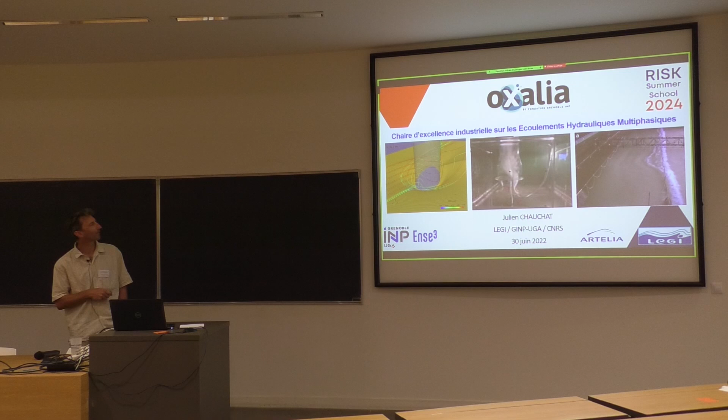I don't know if you heard about industrial chairs. They are run by the Fondation Grenoble INP, so it's kind of mécénat, a relationship between research labs and the Grenoble INP Foundation. A company gives money to try to trigger research in their field of interest. With Artelia, we built this chair OXALIA, which doesn't mean anything—it's just a name close to Artelia—and it's about multi-phase hydraulic flows.

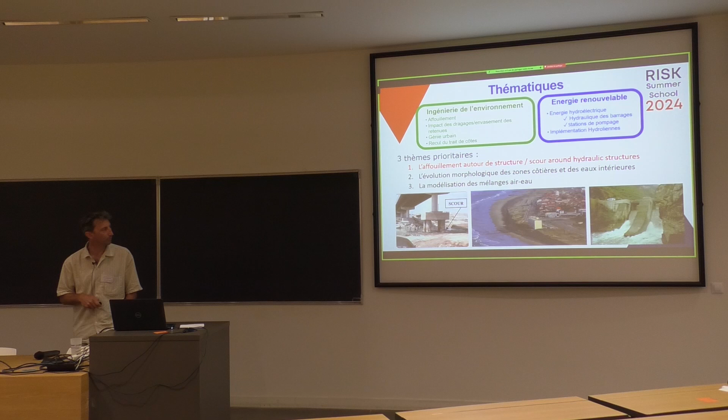More specifically, there are three research themes. This is in French, but I'll translate the first one: Affouillement, which is scour, and I will define that—it will be the topic of my talk today. The second topic is morphological evolution of coastal zones and rivers. The third topic is the modeling of air-water mixtures, like in plunging jets and so on.

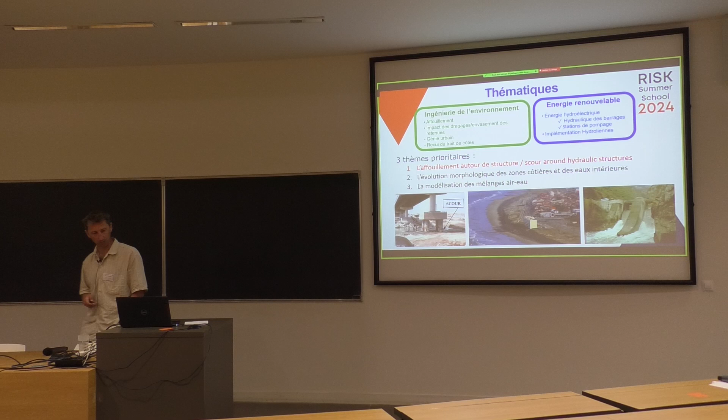So the topic of my talk today is scour around hydraulic structures, which is in fact the main cause for bridge failures. I will show you statistics about this in a few minutes.

This is the outline of my talk: a few motivations, analysis of recent and not-so-recent bridge failures in the US. Then I will describe the flow and sediment transport processes involved in this problem. I will say a few words about the numerical modeling that we try to do, both in engineering and in research, to solve this topic.

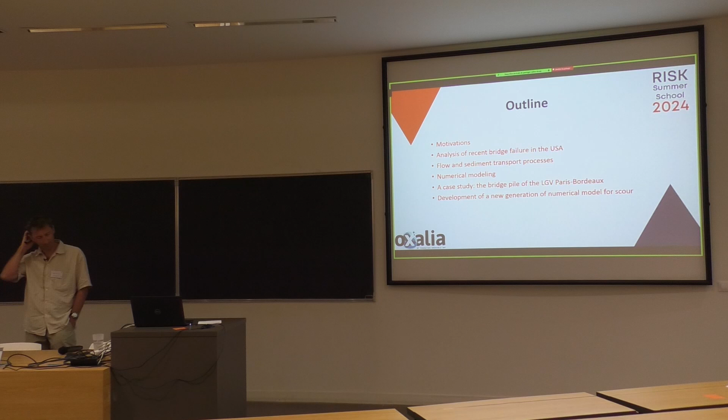I picked a case study from Artelia—they gave me a recent case they did on a bridge pile on the LGV Paris-Bordeaux, the fast train line between Paris and Bordeaux. And I will conclude with the development of a new generation of numerical model, which is the topic of the chair.

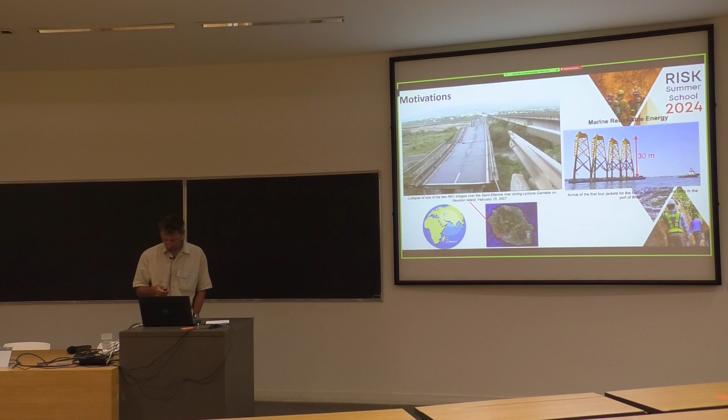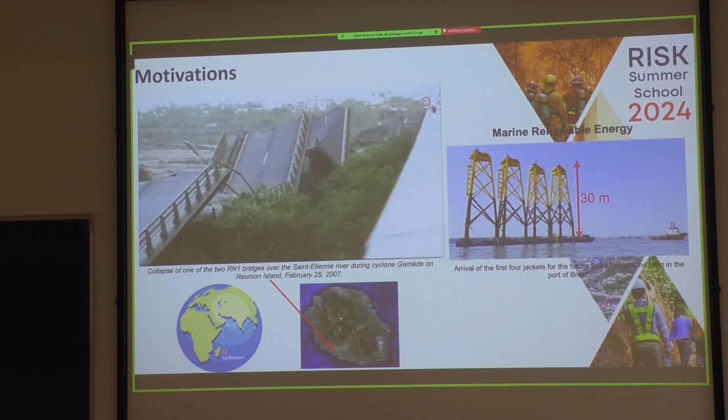All right, motivations, two examples. So here is a movie of... okay, cut it short.

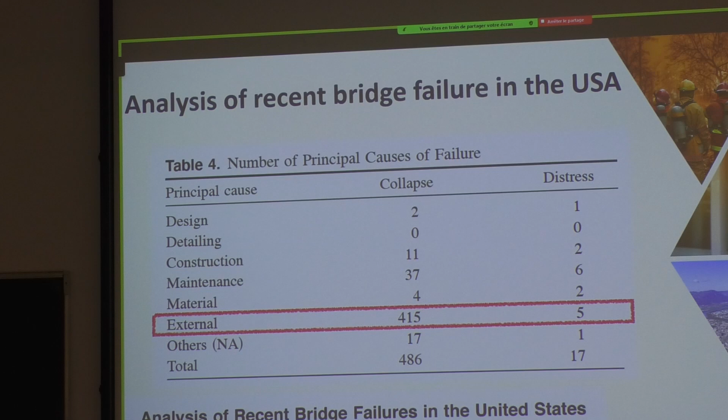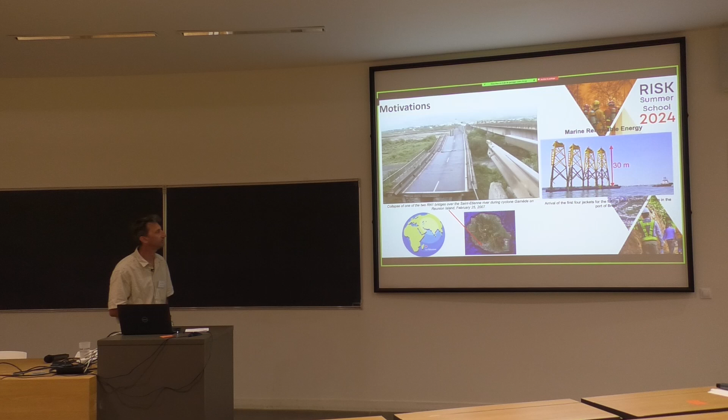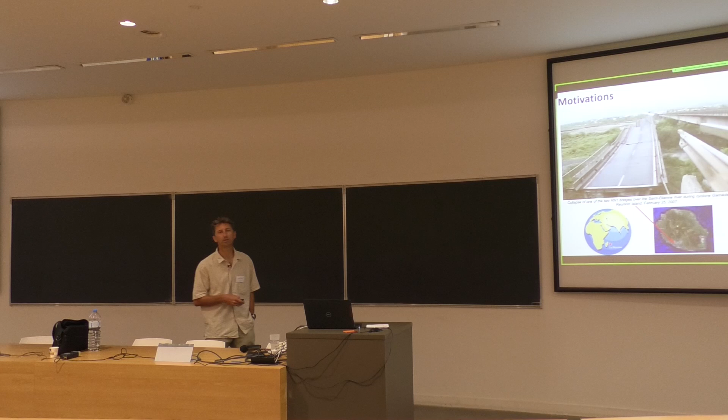The second field where this process is important, a very hot topic nowadays, is marine renewable energy, wind farms. When we build wind farms, we use jackets—these are the jackets of the Saint-Brieuc wind farm in France, 30 meters high. You put that in the ocean, there are tidal currents, there are waves going on. At the foot of those structures, the soil may be dug out by the flow, and it may lead to the collapse of the structure. A wind farm is typically built for 50 years, so we need to account for these processes over a lifetime of about 50 years. These are the motivations for this work.

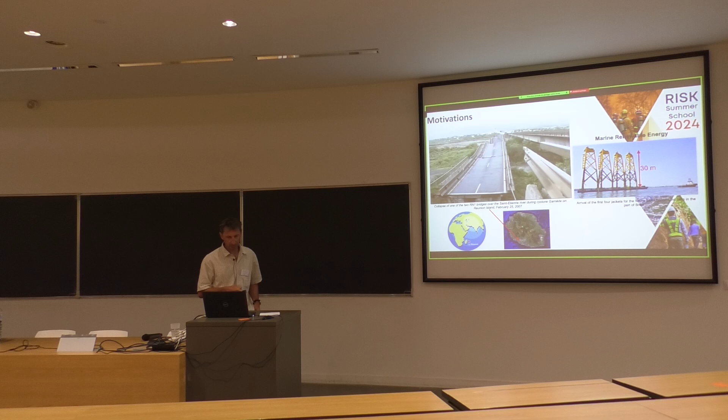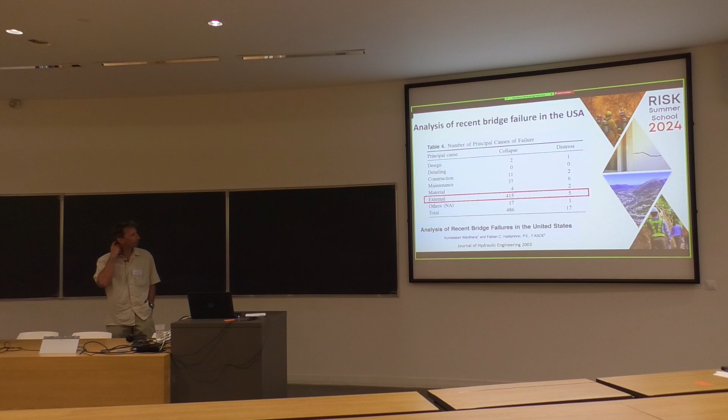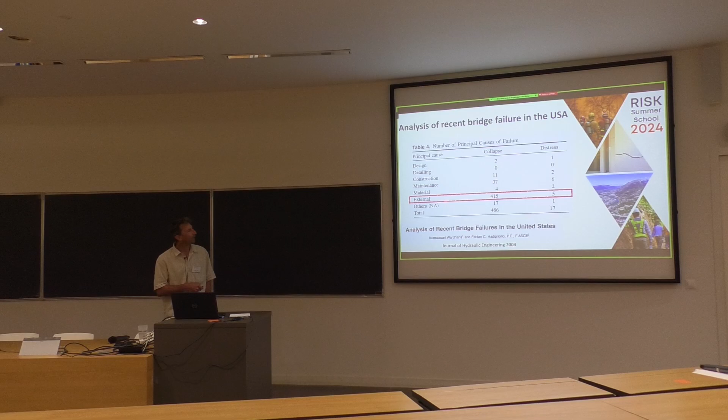If we look at the statistics of bridge failures in the US, two authors published a paper in 2003—at that stage it was recent, now it's not so recent, but at least we have all the statistics, so it's very interesting. The principal causes of failure are essentially external. There are about 500 bridge failures, collapses or distress cases, and among all the possible causes, 415 or so are due to external causes.

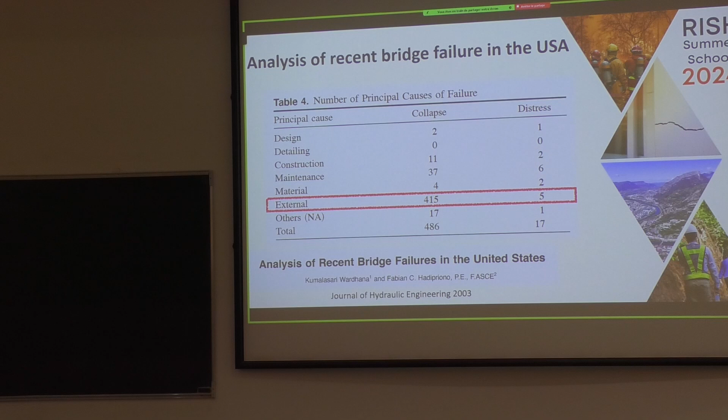The engineers did not mess up with the design, they did not mess up with the construction or anything like that. The main cause is external.

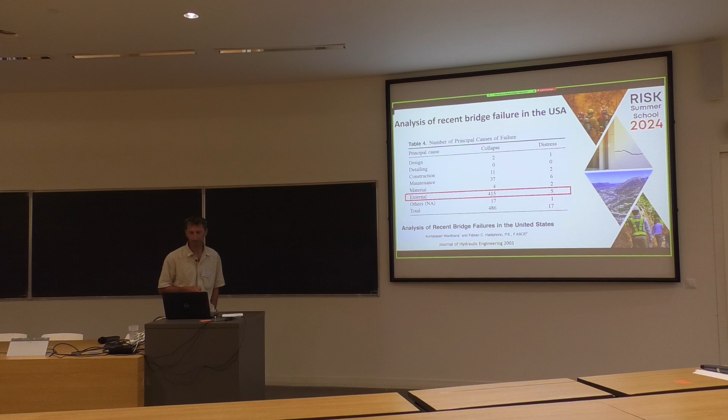If we focus on the external causes, they are classified here by rank of importance, and the top ones are flood and scour. It's very hard to differentiate between flood and scour, but they represent about 50% of bridge failures, so it's the main cause of bridge failure in the US.

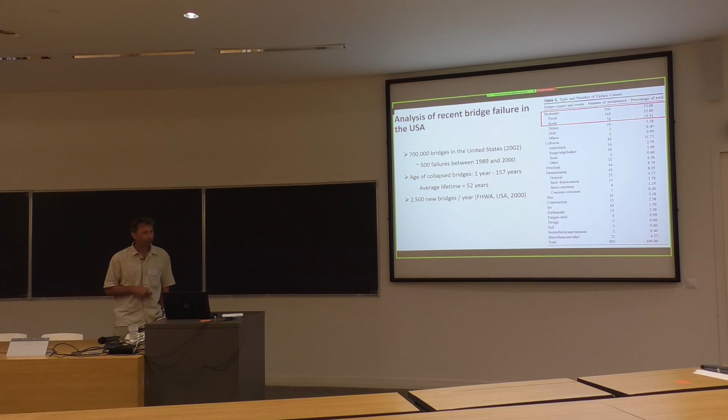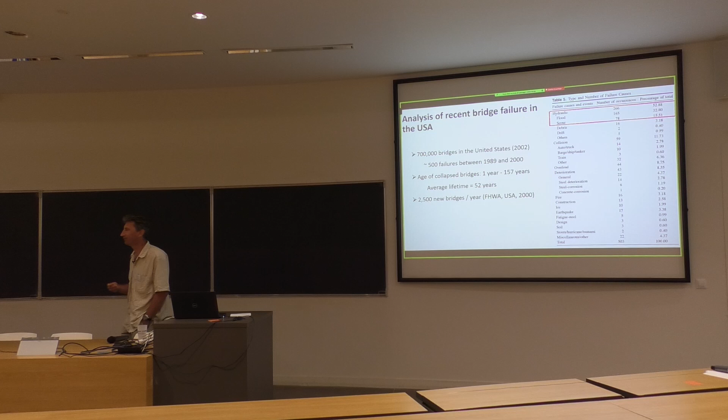A few words about the number of bridges concerned by this problem: there are 700,000 bridges in the US in 2002. 500 failed during the period from 1989 to 2000, which makes the average lifetime of the collapsed bridges about 52 years. Clearly not enough. And 2,500 new bridges are built every year in the US, so it's a very hot topic in civil engineering to be able to predict and design protection for bridge piles.

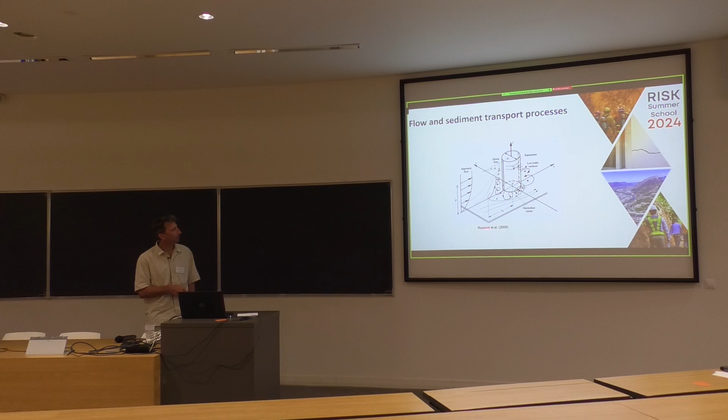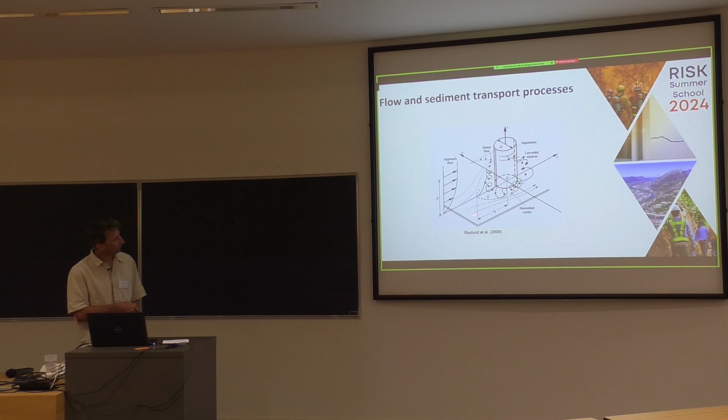I just gave you the motivations and a few words about the statistics, but now let's look at what is scour and what happens to the flow when it goes around a hydraulic structure like a bridge pile. This is a schematic taken from a research paper. If you idealize the flow, you have a circular pile, like a bridge pile, a flat plate at the bottom which is fixed and smooth if you're in a research lab most of the time, and you have an incoming flow here.

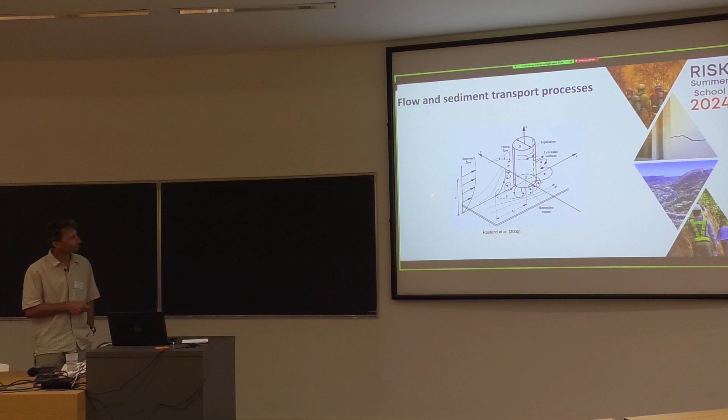The flow goes around the cylinder, and by doing so generates various kinds of vortices. The first kind, which is very classical, and I will show you movies about that, are lee-wake vortices, the so-called von Kármán streets, the alternate vortices shed by the obstacle. If you go along the Isère River to the campus, if you end up close to a bridge, you will see these kinds of vortices.

They span over the entire water depth. The second kind, which you don't see most of the time, is the horseshoe vortex system near the bottom of the pile, and again I will show you snapshots of that. Here basically the flow hits the structure, you have high pressure here, the flow is forced to go downward, and when it reaches the junction with the bed it rolls over itself and generates this horseshoe-like shape, which goes around the structure.

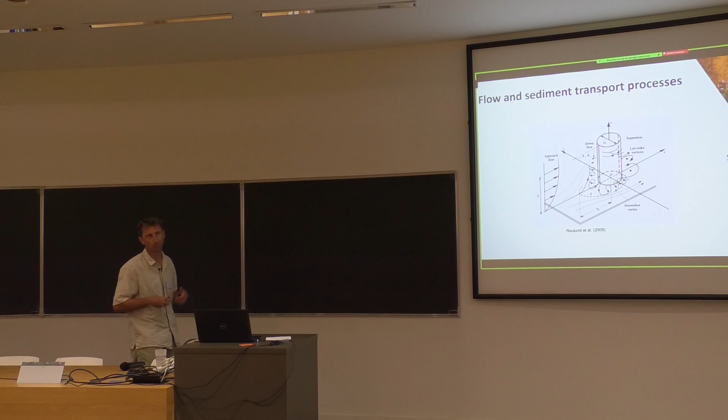All those vortices generate high-speed flow velocities, which generate intense forces or bed shear stress on the bed particles, leading to their transportation. In the end, it's digging the bed around the structure. This is what we call the scour phenomenon.

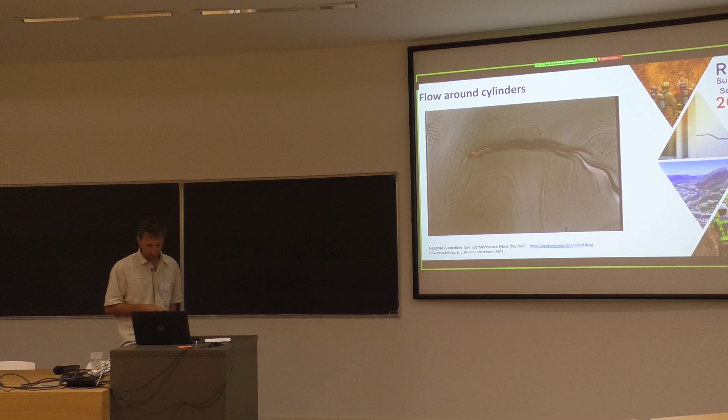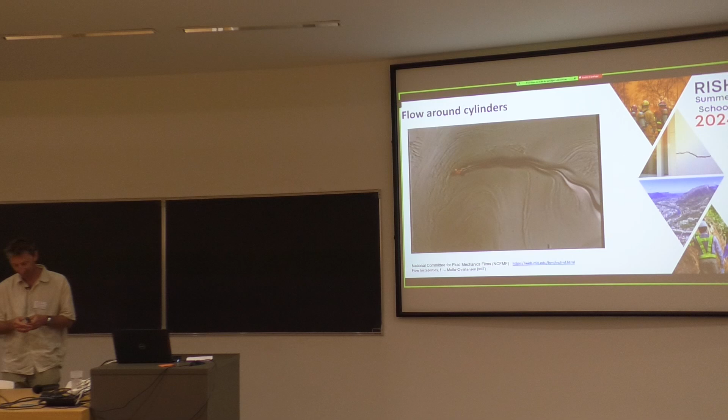Here's a movie from the National Committee for Fluid Mechanics film. If you're willing to learn a bit of fluid mechanics in a fun way, I really encourage you to visit this website. They have movies from the 60s, very vintage, but very nice. The one I show you here is taken from Flow Instabilities by Professor Mollo-Christensen from MIT.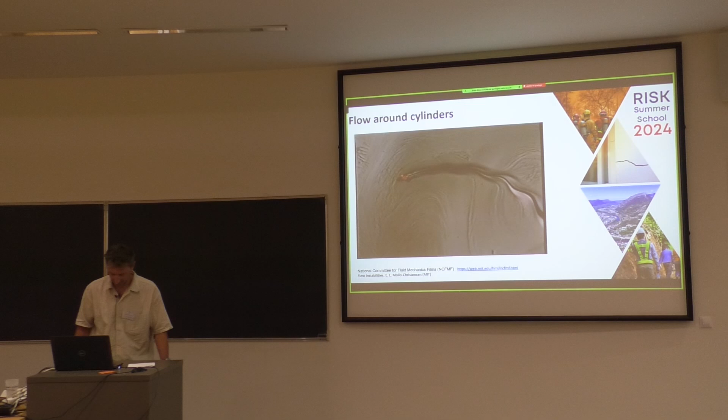I will just play a few minutes to show you how vortex streets are generated when a cylinder is experiencing a flow.

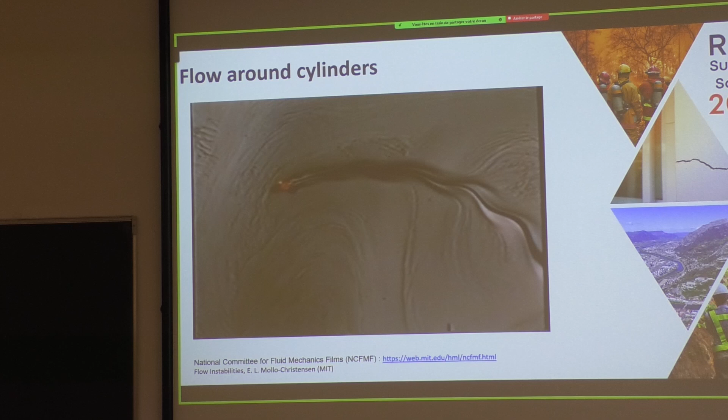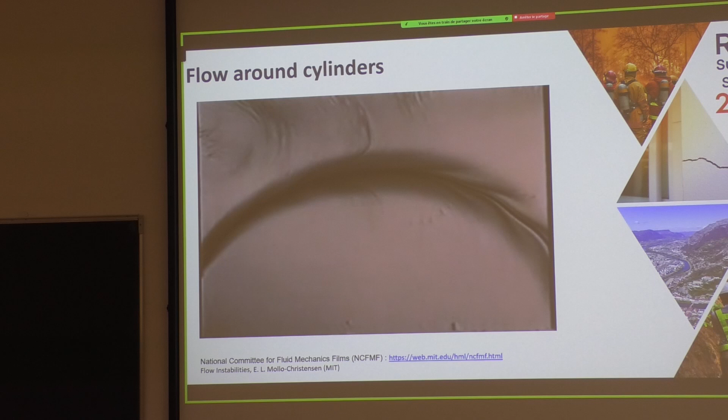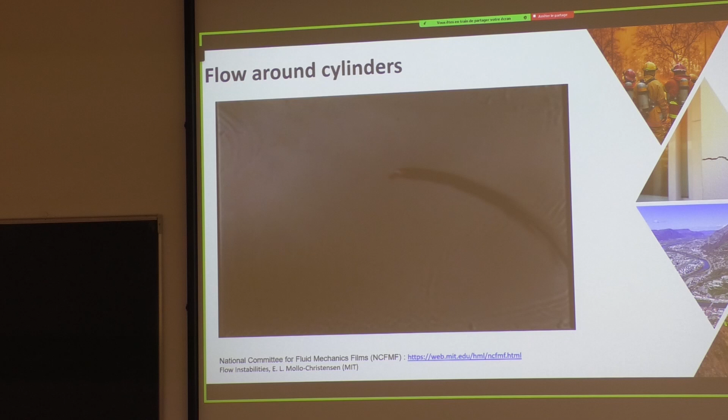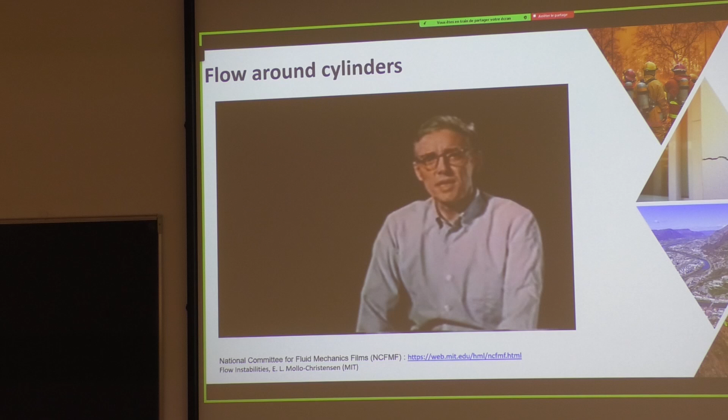The cylinder is steady, although we can see a slight instability in the wake. Increasing the Reynolds number by increasing the velocity, the flow around the cylinder becomes unsteady. A vortex wake develops, the Kármán vortex street. Just below critical Reynolds number, the stability is precarious; a small accidental disturbance is enough to trigger large fluctuations. Now we are in a larger cylinder, the Reynolds number is larger and above critical. It is this instability which makes telephone wires sing in the wind. As we have seen, a steady flow may become unsteady for certain ranges of flow parameters. The instability takes its energy from the mean flow, and the mechanism can be thought of as a selective amplifier, its characteristics governed by flow parameters. The cylinder is steady.

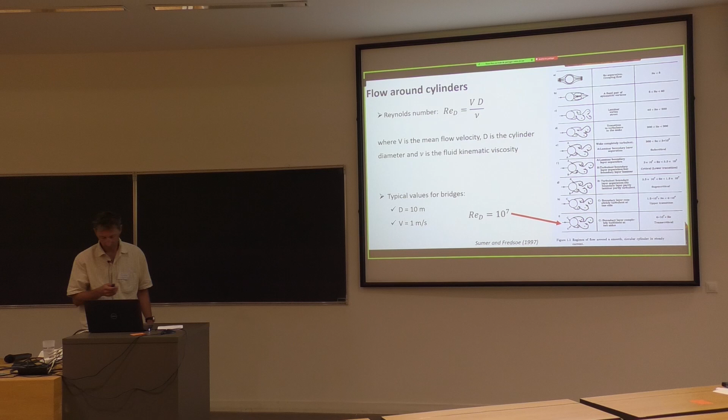So as Mollo-Christensen told you, the control parameter for the flow around the cylinder is the Reynolds number. In fluid mechanics, we like to talk about dimensionless numbers, and this one is probably the most famous. It's a velocity times a length scale—here the pile diameter divided by the viscosity of water.

If you look here, you have the whole range of flows around the cylinder, going from very small Reynolds number—smaller than 5—which is very low, what we call creeping flow. You have no recirculation, no vortices, nothing. It's like dragging a cylinder in honey, very slowly.

But when you increase the Reynolds number, you see that the Kármán streets start to develop. At the beginning they are laminar. If you go to very large Reynolds numbers, you end up with a full turbulent wake.

If you take the numbers of a bridge pile, say the diameter is about 10 meters and the velocity of the water is about 1 meter per second, you end up with a Reynolds number of 10 to the power 7, which is in this range of the classification. So everything is turbulent—the boundary layer is turbulent, the wake is turbulent—and we have to cope with that, which is a very challenging problem. Simulating turbulence in flows is still a challenge.

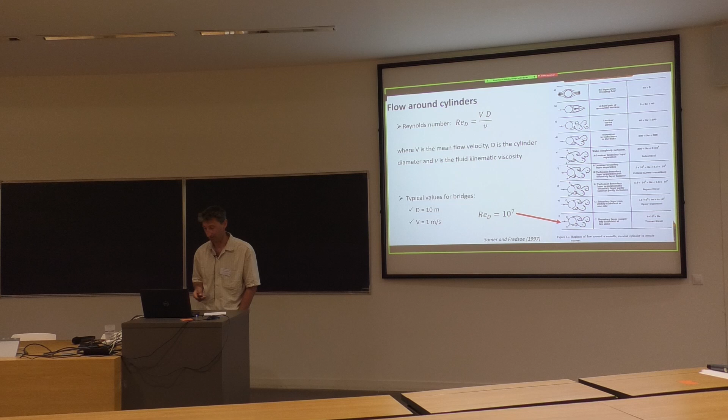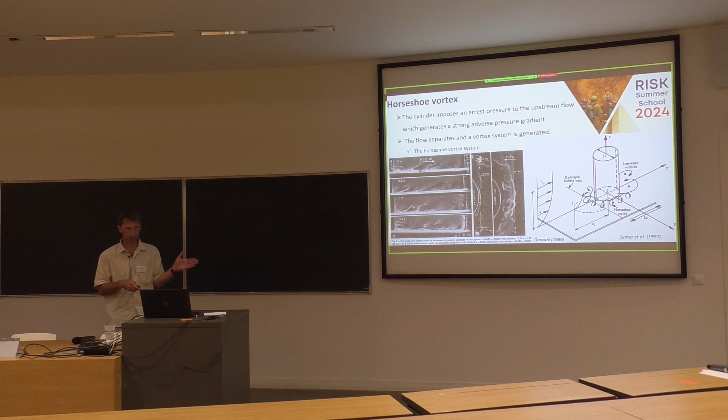This is a schematic. The flow goes down, rolls over itself, generates a first vortex, a secondary vortex, and a third vortex. So this one would be this one. And if you look at it from the top, you see that it goes around the structure with the same shape as the cylinder. These are views from the top, and you see here the shape of this vortex.

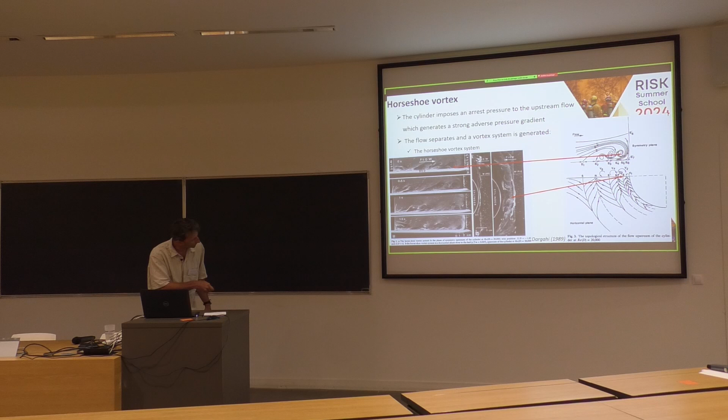Okay, so as I told you, once we have these vortices, they exert some forces on the bottom, and it transports sediments and digs the bed. This is the scour hole that engineers need to prevent to avoid the failure of the structures.

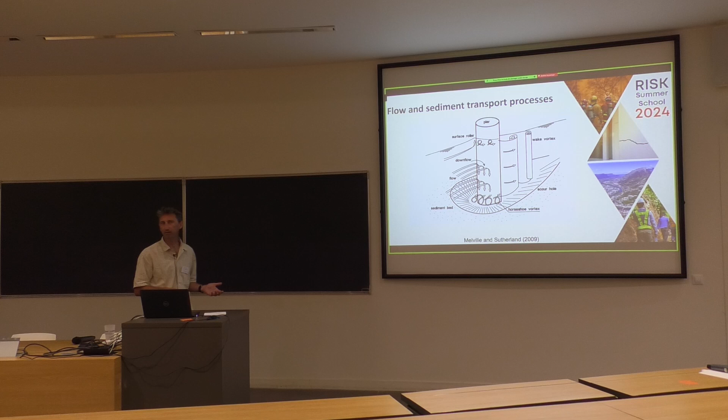In the framework of the OXALIA chair, we did a small experiment that we presented in this amphitheater a couple, maybe 2 years ago, just to illustrate what is happening when we have an incoming flow over a movable bed. We call this the scour movie. These particles are made of plastic, very light, so very easy to transport. This is a cylinder 2 centimeters in diameter, pretty small.

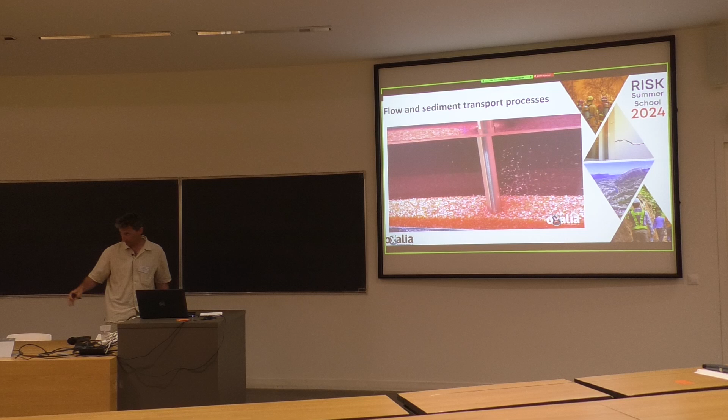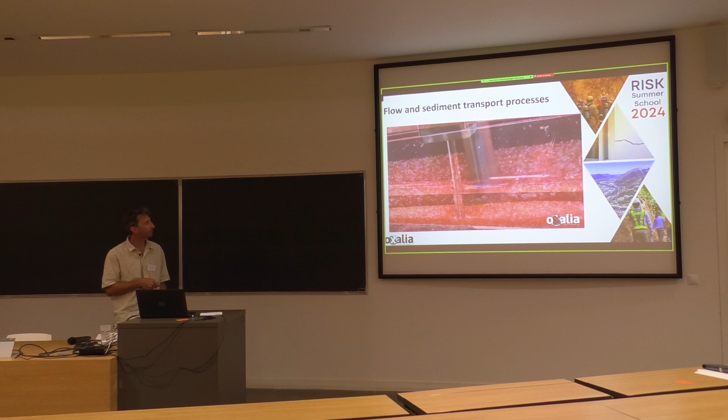And the flow is increasing gently in time. So at the beginning you see these shed vortices that will extract the particles from the bed and suspend them. And if you look in this region, you see the scour hole forming due to the horseshoe vortex system. This process is very fast—the movie is at speed 1—so just in a few minutes in the lab, you can completely remove the soil from the bed.

So in order to solve this or predict this type of mechanism, we'd like to use numerical modeling—at least this is what I'm doing. And for that, if you do a bit of fluid mechanics, you probably know that we use Navier-Stokes equations. In this case, as the flow is fully turbulent, we use Reynolds averaging.

Reynolds averaging is either time averaging or statistical averaging—it's not the point here. What it changes for the Navier-Stokes equation is that it adds an additional stress, due to turbulence. And we close that with turbulence models, which is clearly the weak point of the approach. Here I show you what we use in engineering: K-epsilon or K-omega SST models. Basically, we relate the eddy viscosity to the turbulent kinetic energy of the fluid and the turbulent energy dissipation.

In the framework of the chair, and in the framework of the Master 2 internship of Matthias Renaud, funded by the Chaire OXALIA, we decided to evaluate 2 different models, OpenFOAM and Telemac 3D, which solve this equation, the same equations, but with very slight differences.

So I tried to summarize just very quickly the differences.

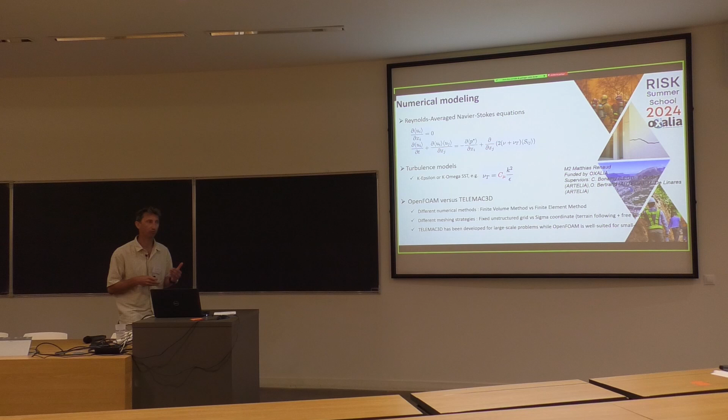While OpenFOAM is really a computational fluid dynamics model, which is very well suited for fine-scale flow predictions.

So the first thing we did is to try to simulate the flow around the cylinder, the same case for which we have data with the two models, to select the best candidate for the future of the model development.

At the top, you have an illustration of the OpenFOAM solution. What you see here is what we call a Q criterion. It's just a representation of the coherent structures, okay, vortices.

So here you see the horseshoe vortex that I talked about. These are the shed vortices. See, they span over the entire water depth, like columnar vortices.

With Telemac 3D, very similar patterns, but slightly different. You see there is not much variation near the bottom here. But in both cases, we do observe the vortices.

The question is which one is the best? And to do that, we need to compare with experimental data for this configuration.

So this is what I show here. The cylinder is here. Each plot represents a different elevation: 20 centimeters above the bed, which is about the water depth, 5 centimeters, 1 centimeter, 0.5 centimeters.

So here we are very near the wall. The points are the experiments. The red profile is Telemac 3D, and the green one is OpenFOAM.

Very far from the wall, you don't see much difference, except maybe in the wake. But as you reach near the bottom, here you see a very significant difference, especially in the horseshoe vortex region. The green one fits quite well with the data, while the red one, not at all.

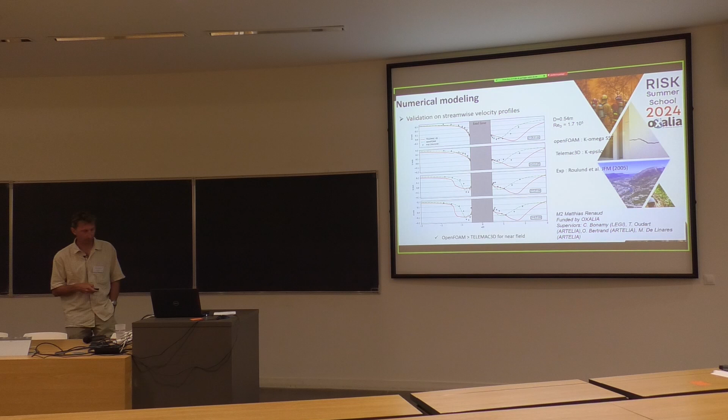All right, so this was for the flow processes. Now I move to sediment transport.

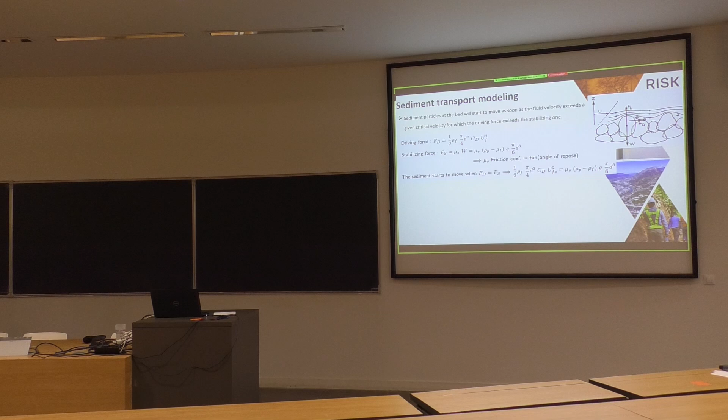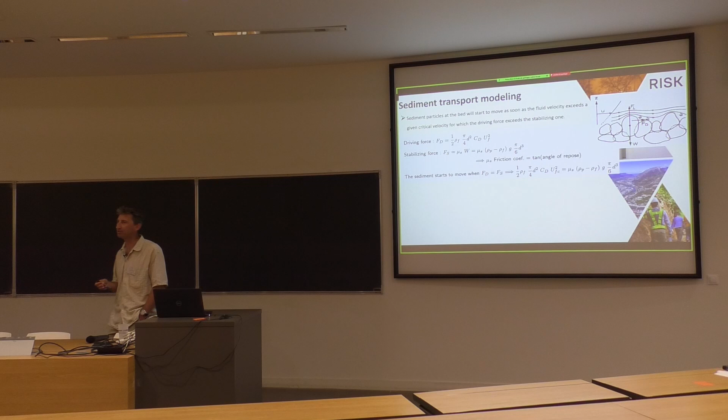So for sediment transport processes, the main parameter or feature that we need to understand is the existence of a threshold of motion for particles deposited at the bed.

If you take this sketch here, you have the bed. We take one isolated particle, and we make a force balance on it.

The driving force is a drag force. So you have a flow above it, and we assume that this particle will be set into motion by a drag force, which is given by this very classical expression.

And the stabilizing force will be a friction force. So the weight of the particle, W, times a friction coefficient, which can be seen as some kind of tangent of the angle of repose.

So if this drag force exceeds the stabilizing force, the grain at the bottom starts to move. I write this down here. If in this equation we put on the left side all the dimensional parameters and on the right side all the dimensionless parameters, we build a non-dimensional parameter.

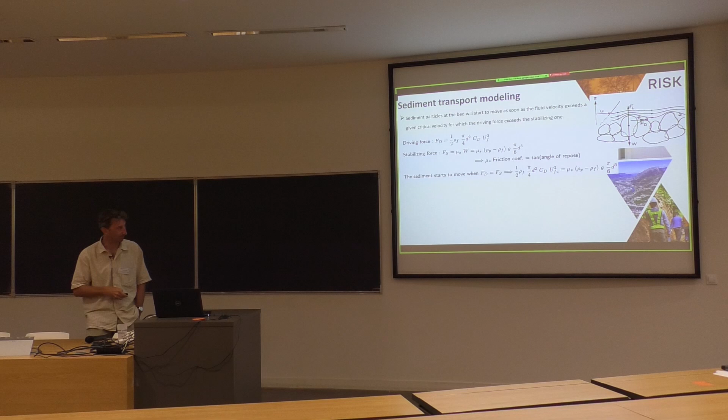Which is a critical Shields number. So it's UF squared, the near bed flow velocity, divided by the density ratio minus 1, times gravity, times diameter.

This is the criteria that we use to say if, for certain conditions, the particles are moving or not.

Experiments done a century ago by Shields are gathered on this curve, and as always, they are a function of the Reynolds number. But basically, what these curves tell you is that particles start to move for this number between 0.03 and 0.06.

So when we do simulations and when we get the flow around the cylinder, if we plug this function or this criteria, we can determine when the particles move and when the particles don't move.

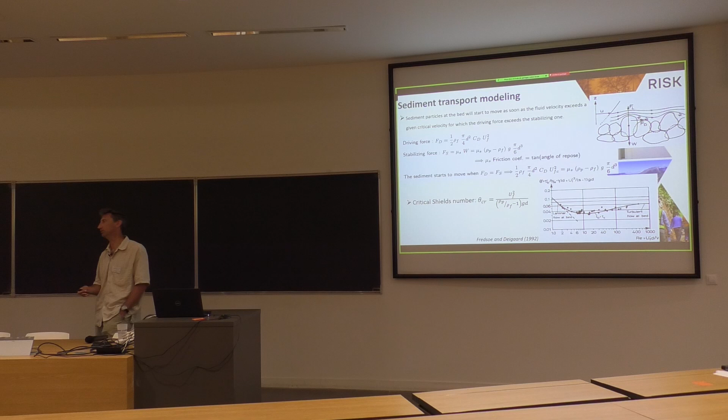If we exceed this threshold, the particles are moving, they are transported, and we need to predict how much particles are transported for a given flow. So we have a whole range of regimes. The first one is bed load, when particles move very near the bed with permanent or intermittent contact with the bed—very near the threshold of motion.

If we increase the Shields number more, particles start to be picked up by the flow, by the turbulent vortices, and are transported as suspension, as I showed you in the movie earlier. This is characterized by another number, the ratio of bed friction velocity to settling velocity. To make the long story short, if turbulent velocity fluctuations are larger than the settling velocity, particles can be picked up by the flow and transported in suspension. Otherwise, they settle to the bed and are transported as bed load.

In engineering models, this is the water column. We split the domain into two parts. In the suspended region, we solve hydrodynamic equations, Navier-Stokes, plus a transport equation for the concentration. Very near the bed, about the size of the particles, a few times the size of the particles, it's not resolved by the model, and we parameterize the bed load as a sediment flux. The interactions between these two layers are parameterized through empirical formulas.

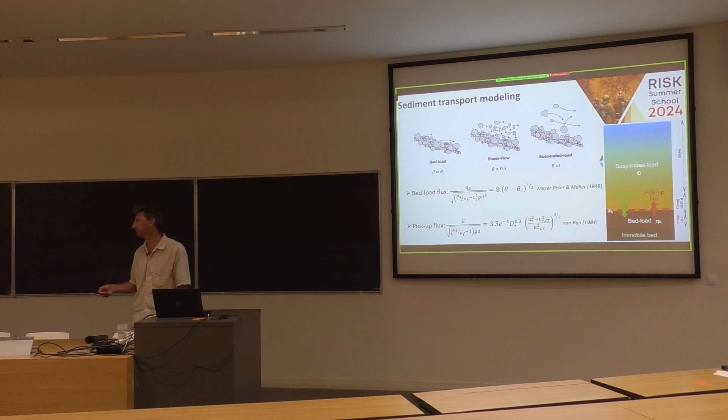In research, most of my research activities, as Mathieu told you this morning, is to put solids in fluids—I'm a fluid mechanics guy, so I'm more on the fluid side. But we'd like to develop new models that we call two-phase flow models, where we solve dynamical equations for both the sediments and the fluid. So it's a very physically based approach.

So here, I told you we have empirical formulas for almost everything. Here, we try to resolve the mechanical equations for the entire range of concentration, including in the immobile bed. So here we use rheological models, kinetic theories, and so on. In this approach, we can incorporate most of the dominant processes, like turbulence-particle interactions, and even particle-particle interactions. And we don't have to split the water column arbitrarily between what's going on in the bed and what's going on in the water column.

The main difficulty is that a lot of those processes are very complex to model, and it took us about 20 to 30 years to get closures for all those processes. The second problem is that it's very expensive, as I'll show you in the next slide. So we cannot apply it at large scale, and it's not possible to use this approach in engineering applications.

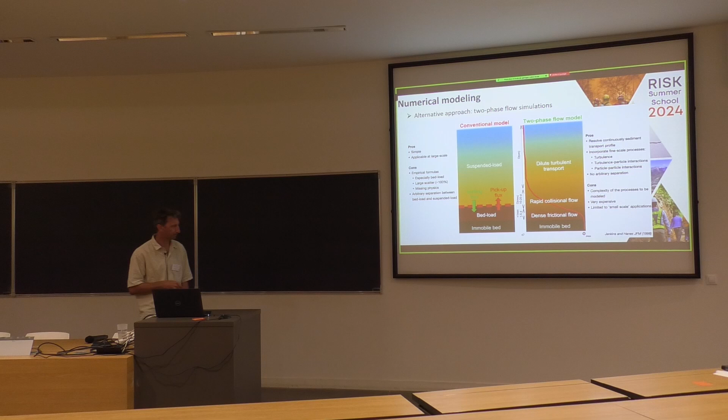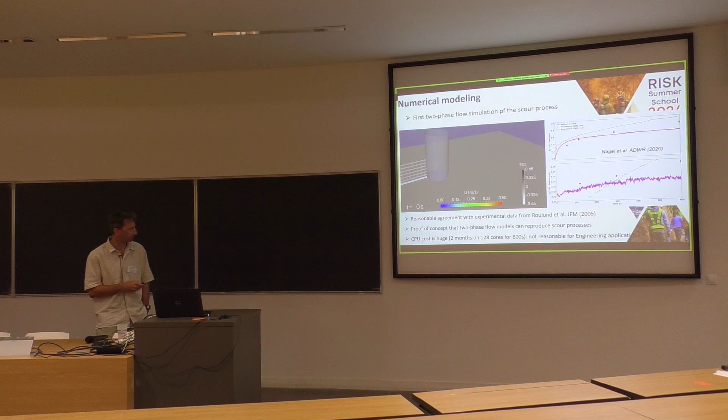Here you'll see the streamlines of the incoming flow colored by their velocities. The gray level is the bottom elevation taken by reference to its original position. You see the flow going down, the horseshoe vortex, the necklace vortices. Here, the entanglement of streamlines represents the vortices shed behind the cylinder. And you see the bed is dug around the cylinder through what we call the scour process.

Qualitatively, it's nice; quantitatively, it's not too bad. Here I show in magenta a comparison with experiments, as red dots, of the scour depth—how much the bed has been dug upstream and downstream of the cylinder. Of course the results aren't perfect, but qualitatively, after 600 seconds, about 10 minutes, the amount of sediment that has been taken out near the cylinder is approximately correct.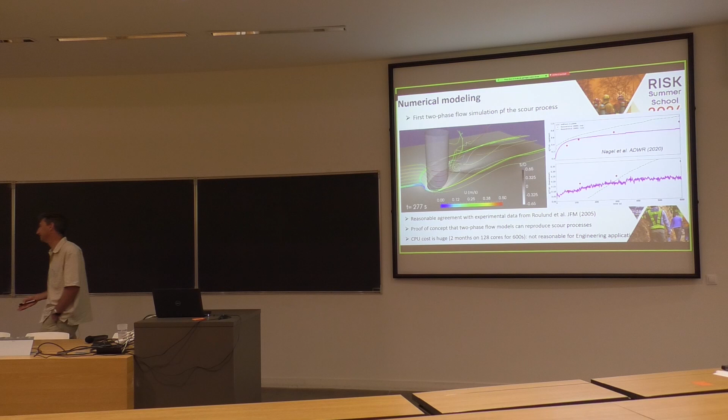But this is really a proof of concept, and it's really the first time this type of simulation was done with this approach. As I told you, the CPU cost is very large—it ran for 2 months on 128 cores just to perform 10 minutes of simulation. So when I tell that to engineers, they say, okay, it's not possible, I cannot afford that, you need to do something else. But it was the starting point of the OXALIA chair, to discuss with them and come up with some kind of agreement between this approach and theirs, to improve engineering practice.

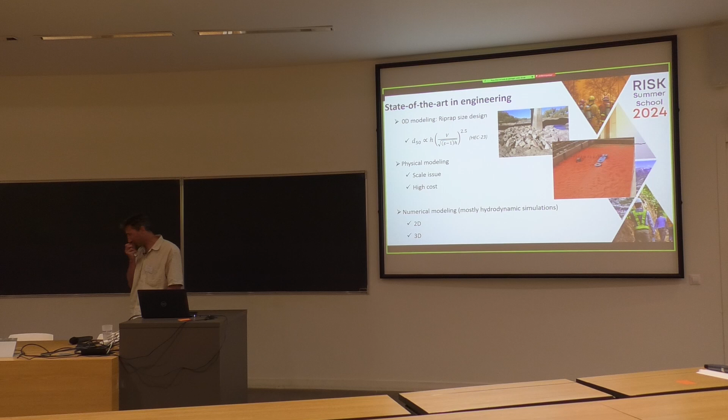Engineering practice is the next slide. It's the state of the art. So the most basic approach is the 0D modeling.

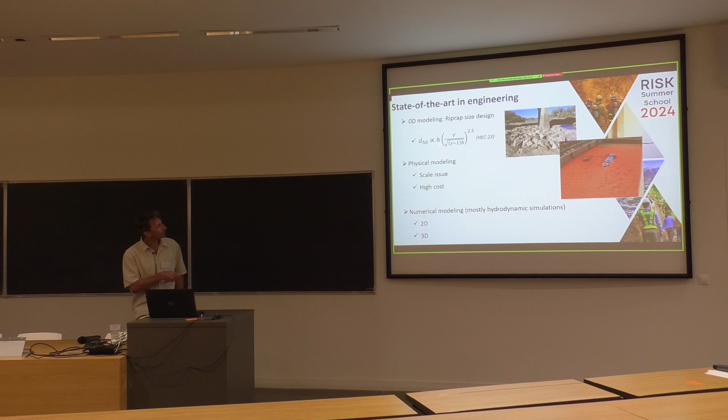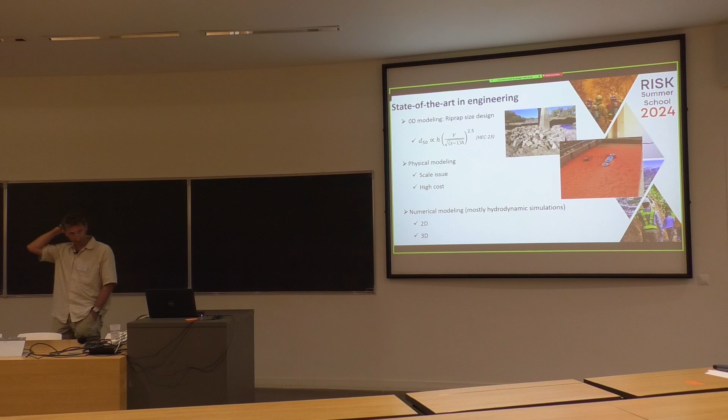To prevent scour, what engineers do, it's this movie. You have a bridge pile here. They put riprap, like big boulders, and the question is how big these boulders should be to protect the bridge pile. Remember I told you about this threshold of motion, this critical Shields number. So this is the criteria that they use. For that, you can define a D50, which depends on the water depth, the flow velocity, and the density ratio of the boulders to determine how big these boulders should be to prevent the scour from developing.

Here you see you need two pieces of information: a velocity and a water depth. So you need a hydrodynamic model to get this information, or a physical model, right?

Physical model, this is an illustration of a physical model that Artelia did for a bridge in Bordeaux. The red particles are the same as the ones I showed you in the movie of scour earlier on.

But when you do physical models, you have two limitations. The first one is the scale issue. You reduce the scale, but you still use water, so you are not at the same Reynolds number. We are completely stuck with this Reynolds number, and you cannot change the fluid. So there are scale issues.

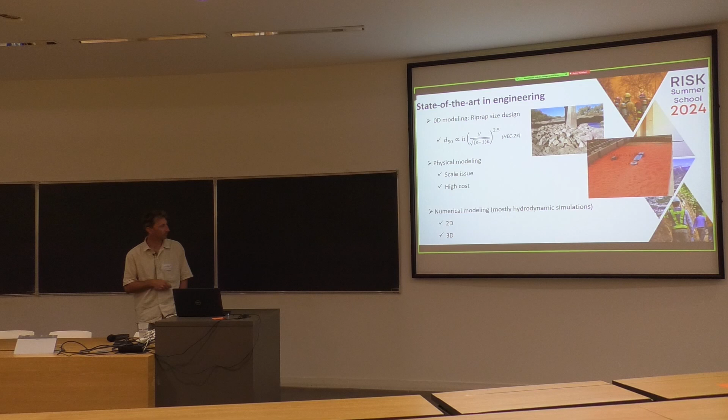And the cost to build this type of model is about a few tens of kilo euros, so not everybody is ready to pay this much to study or prevent scour. The alternative is to use numerical modeling, essentially hydrodynamics, sometimes 2D, and nowadays more and more 3D models.

So what does Artelia do when they are asked to analyze scour in a real case? This is taken from a real study that they did: the initial design of the Dordogne viaduct. The Dordogne viaduct is here, okay, and this is the Gironde, Bordeaux is here.

This is the true full-scale viaduct that was built in 2017, so it's very recent, and the study was done in 2012. This is a picture taken from the physical model they did at this point. You see that the pile, at the bottom there is a footing, which is above the bed, and they designed scour protection with riprap on both sides of the pile.

So this is what they suggested to do. They built the viaduct in 2017, and then they followed the bathymetry year after year. In 2020, only 3 years after construction, they realized that the digging was too fast, and they reached the level of vigilance. So they had to go back and make a new study to evaluate why the bed was dug so fast and to propose remediation solutions.

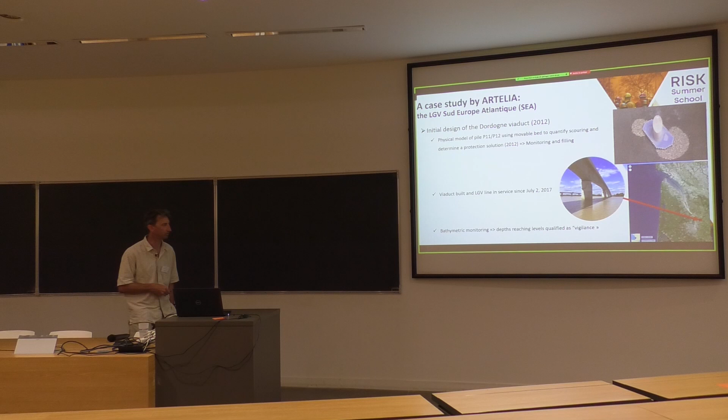And for that, they used numerical models. The experts said, okay, the problem is that if you start digging the bed, the footing becomes too large. Then the problem is not the scour around the structure itself, but it's the scour around the footing.

And they did two situations: one at the physical model size with the original footing, and one with a larger footing, just to check if a larger footing could lead to additional stress on the bed.

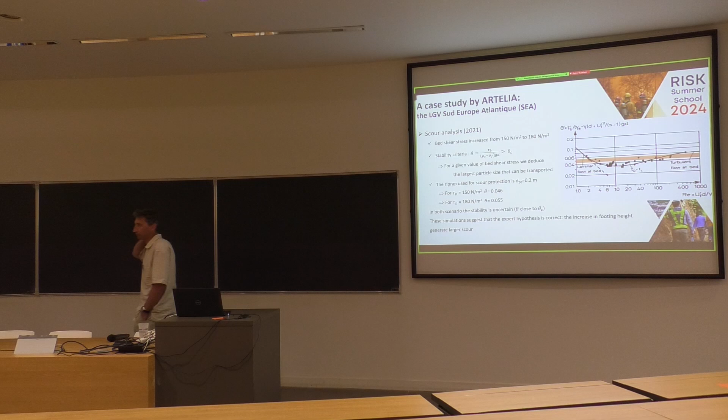So this tends to confirm the expert hypothesis. And now the question is, what do we do to solve this matter? Or what OXALIA is doing? They use this kind of approach, mentioning these two models, this large-scale Telemac model, Telemac 3D.

In this region, which is pretty far from the estuary, you still have the influence of the tide and of the river discharge. So they did 3 configurations. I'm not going to detail all that, but from those simulations they can force a small-scale model for the near field using OpenFOAM, the computational fluid dynamics model.

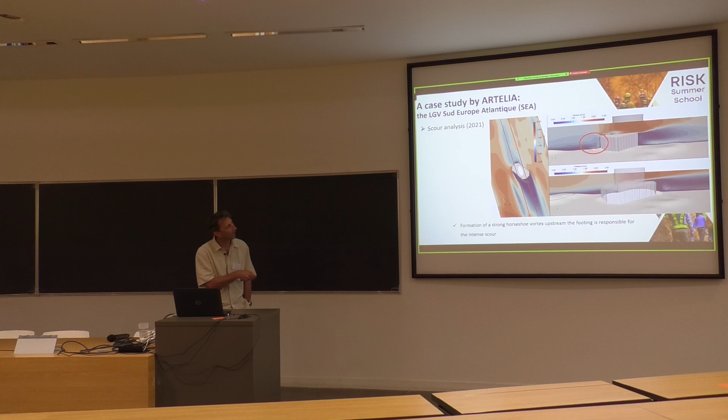And they did these different simulations. I just show you one snapshot. So this is the bridge pile, these are the transects, so this one is here. And you see on the velocity field that, as in the previous simulations, we do observe an impinging jet, which is pretty strong, at the footing, near the footing of the bridge protection.

When they got the bed shear stress here, they realized that the riprap was too small. The recommendation is to refill the riprap, but with larger particles to increase the intrinsic stability of the protection. They advise using 40 centimeter particles, which makes the Shields number 0.023 at worst, and which should maintain the protection for the strongest conditions faced by the bridge.

So this study shows you how we can use 3D numerical simulations at different scales to evaluate the scour problem and to propose remediation solutions. So at least this is what engineers do nowadays.

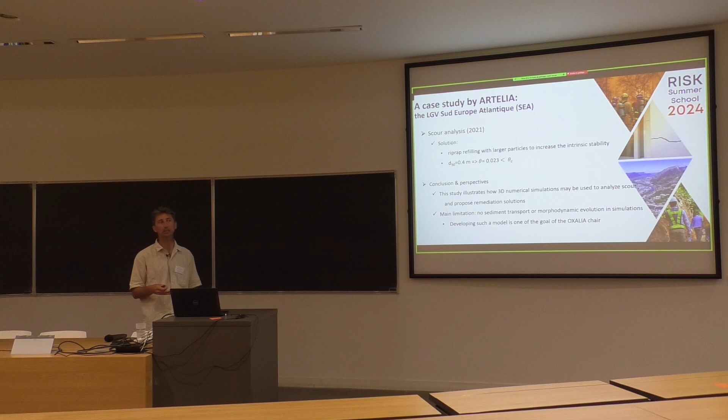But the main limitation so far is that they just did hydrodynamic simulations. They did not do any sediment transport or bed evolution simulations. And this is the goal of the Chaire: to develop a new model that is able to predict the scour, the digging of the bed, with reasonable computational time so that engineers can actually use it in practice.

This is the topic of Matthias Renaud's PhD thesis, which started in 2022. We do open source modeling, so we couple Navier-Stokes simulations with a transport equation for the concentration and a bed evolution equation. This is just the first result of Matthias.